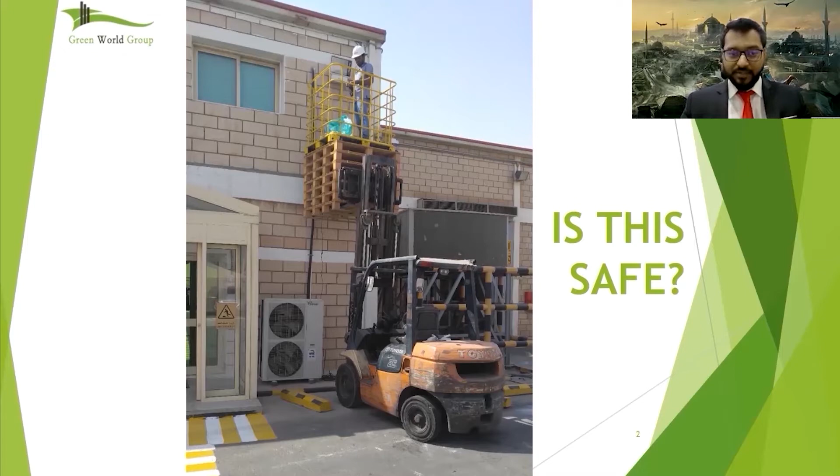So let's talk about the fall statistics, first of all. Falls are the leading cause of death in construction industries, not just construction industries, but also when we're working at height. So most fatalities occur when employees fall from open side floors or through floor openings. Now, the height at which a fall can occur does pose the impact of its severity.

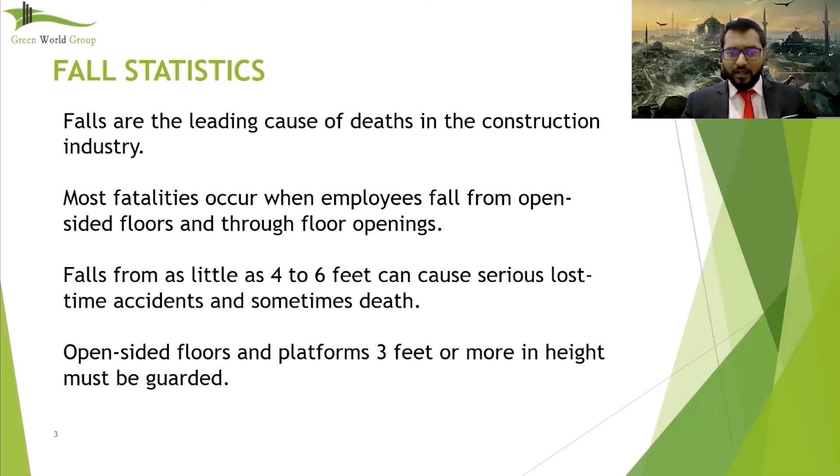But here's the thing. If I were to ask you in terms of many detailed examples, which I will actually further ask you in detail, I'll give you a scenario where we can discuss which would be better. But again, I'm going ahead of my time, let's go on towards statistics more importantly.

So if we take a look at the world scope of fall statistics, we have numerous amounts of people who have fell due to slips or falls that have been hospitalized that would require medical assistance. And that around the world yearly is around 540,000 people. People that end up with permanent disabilities due to these injuries are around 300,000.

And fatalities from slips and falls is around 25,000 a year.

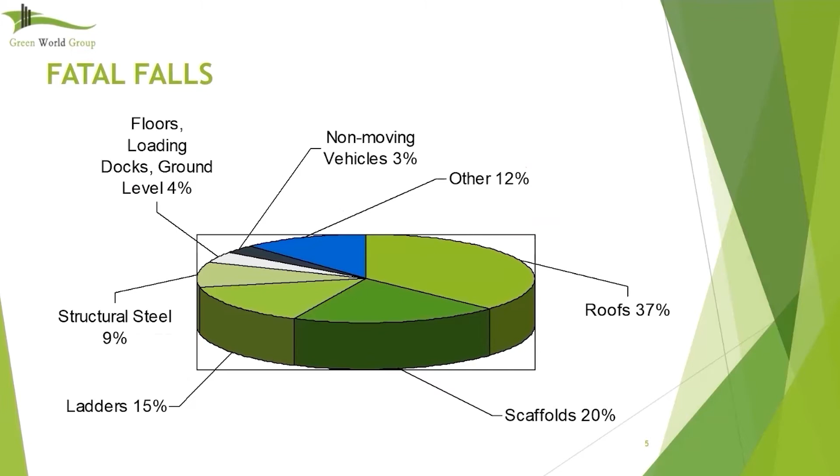Now, where's our problem? We could provide trainings, yes, we could raise awareness, but it all starts within us. We, the employees, must understand the severity of working at height and the hazards that come with it, hazards as well as the risks.

So again, if we just talk about fatalities from falls, we have done statistics over where we can categorize these. As you can see, the most amount of fatalities occur due to falling from rooftops, around 37%. Then comes the scaffolding, which is around 20%. And then working at ladders, either the quality of the ladder or the way the ladder is set up can result towards falling from that height. And then we talk about structural steels, which is around 9%, and so on.

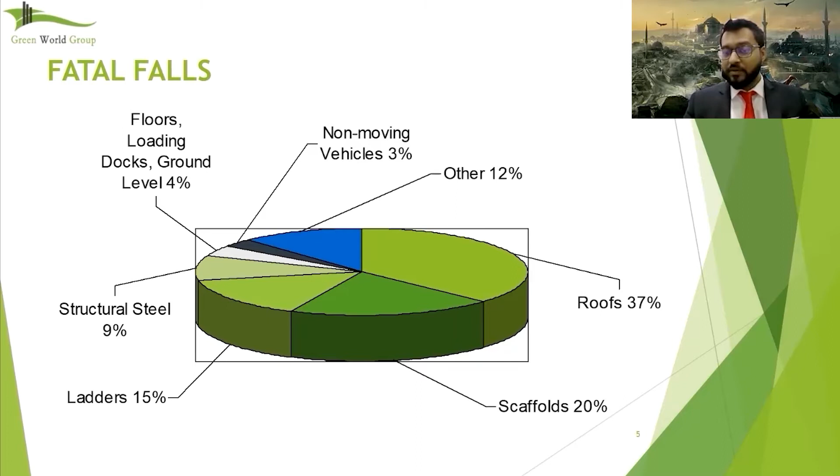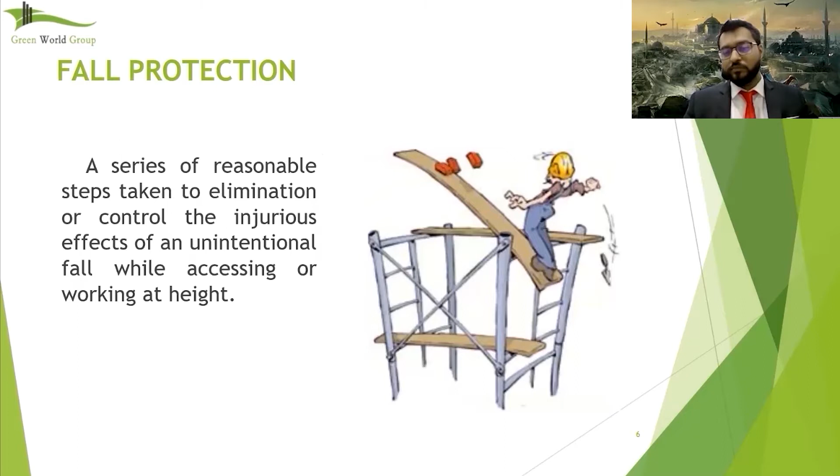But let's define fall protection. What is fall, to be honest? A series of reasonable steps taken to eliminate or control the injurious effects of the unintentional fall while accessing or working at height. Right? So to break it down in a way.

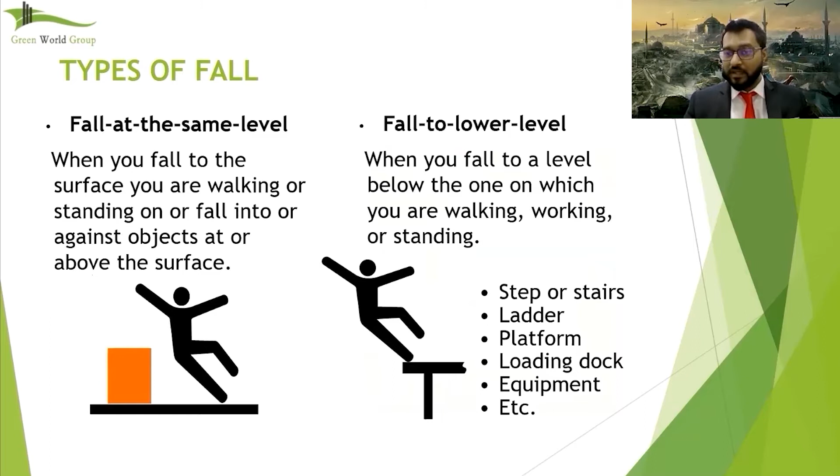But there are different types of falls that we must consider. Obviously, there's the fall at the same level within the surface that you might have fallen from. And then there is the fall to a lower level from a height, right? So these could result from either stairs, ladders, platforms, loading docks, and equipments, such as mobile elevated platforms or scaffolds, right?

So here's the question I wanted to ask you. If you were to stand on the table in front of you and fall from it, that's one scenario. And if you were to stand on a rooftop and fall from it, which would hurt you a lot more, or which would be much more severe?

A lot of people would say the rooftop. But here's the thing: if you're working at a rooftop, you know there's a major risk involved in falling from it, so you'll be well prepared, do the assessment, and manage your safety through it. But if you were to stand on your table, you wouldn't think that much about it.

But here's the thing: the severity of the fall from the table is much higher than the severity of the fall from height. Why? Because when you fall from the table, you probably land on your head, with very limited time to even realize you're falling, and boom, the impact occurs. However, falling from height, you'd still have some time to realize you're falling. There would be some self-awareness, and you'd try to do something to prevent landing on your head, like falling on the side or protecting your head while mid-fall.

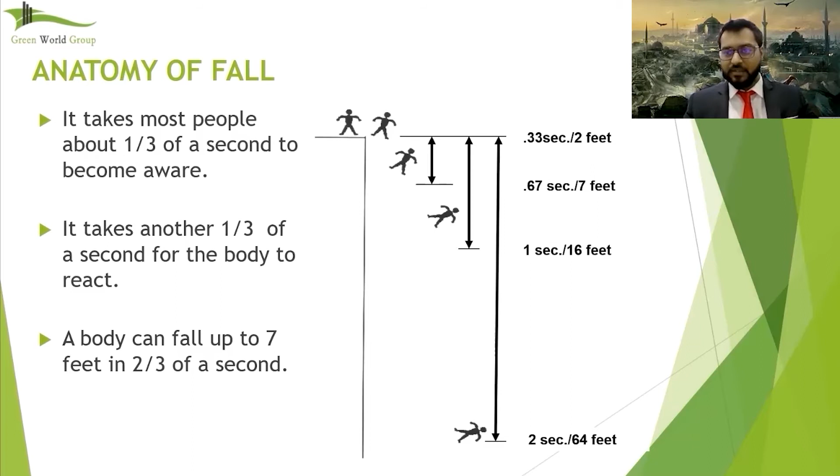Now let's quickly talk about fall protection and the systems towards it. Whenever you're assessing any sort of work, we must always follow the hierarchy of controls. In the fall protection aspect, we must follow the same line of control, but here we're just going to add a few more things.

Can't do that, don't have the right place for it, or don't have the controls for it, then try implementing fall restraint lanyards, which would prevent you from falling in the first place, so you can work as close to the edge without the risk of going beyond.

If that doesn't work, then you go on to the fourth step, which is a fall arrest system. That could be an extended lanyard, a retractable lanyard, or a shock absorbing lanyard. And finally, the administrative control, which means limiting the people who are not authorized to be there—only trained individuals who are competent enough to work at that height.

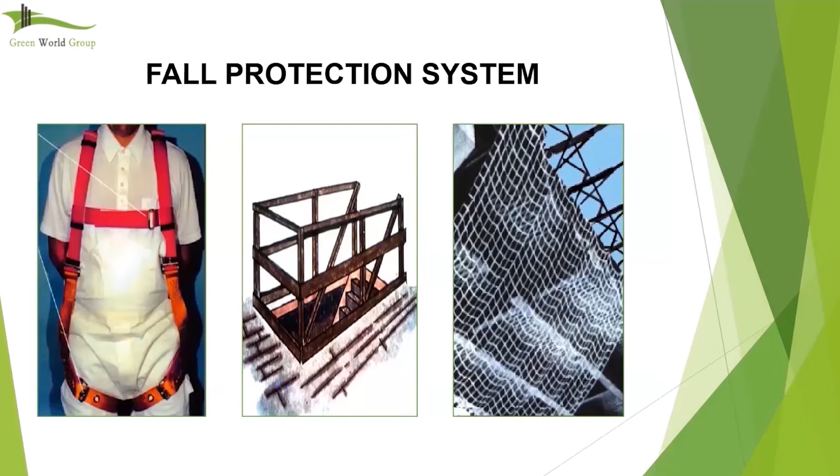So moving on towards the fall protection system, we will talk in depth about the full body harness and its different features.

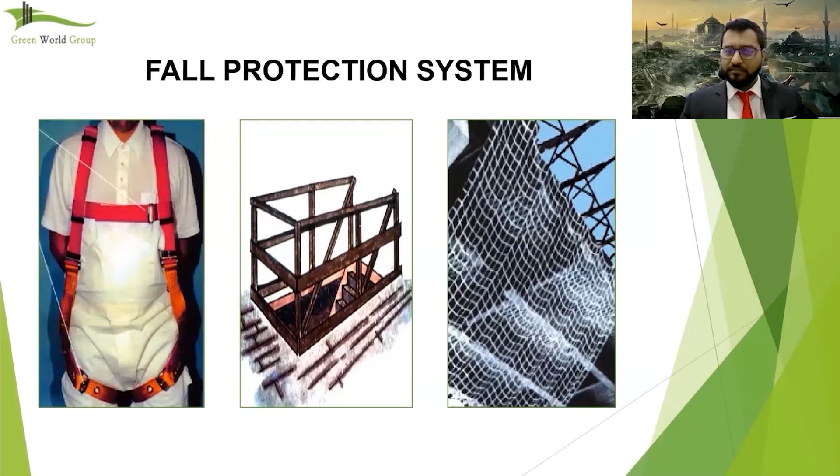The guardrail system is an engineering control to cover up openings within the floor. Another control system would be a safety net.

Now, talking about a full body harness, yes, we've seen what it really looks like, but the main thing I'd like to talk about is the D-ring found in the back. This is the connection point between your harness and your lanyard, to where you will anchor yourself.

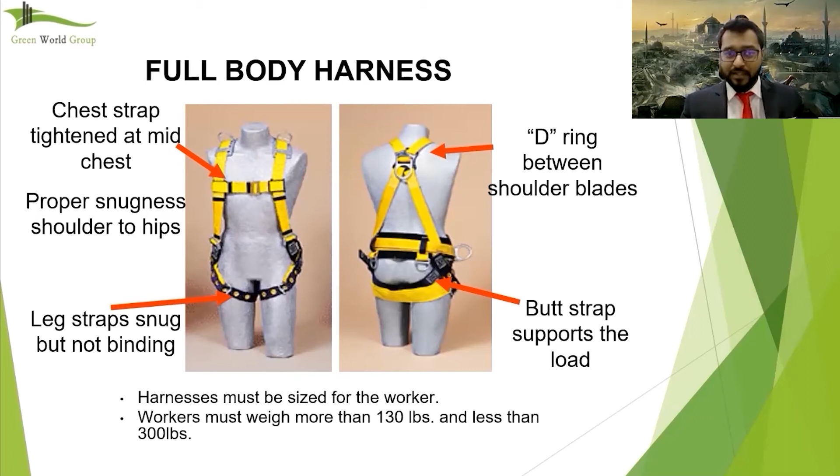Now, how tight the strap should be, you can take one of our in-detail classes, and I can discuss the exact amount of tightness with you, along with the actual practical aspect of it.

Now, different parts of the full body harness, as you can see on your screen, there are lanyards and a full body harness that goes onto your body. Most full body harnesses today are very similar, actually mostly the same, but the difference comes through the lanyards. There's a variety of lanyards depending on the specification of your job or task.

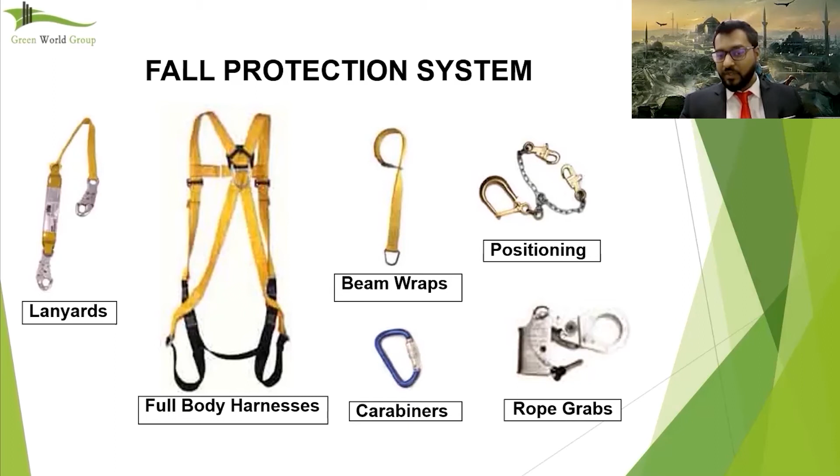And then we have beam wraps, carabiners, positioning devices, as well as rope grabs, which we will also talk about in detail.

So, minimizing the free fall distance, we have to keep in consideration what our height factor is, and if we're using a lanyard that extends and allows a grace period for fall distance, we must keep in consideration what our lanyard can extend to and what our height target is.

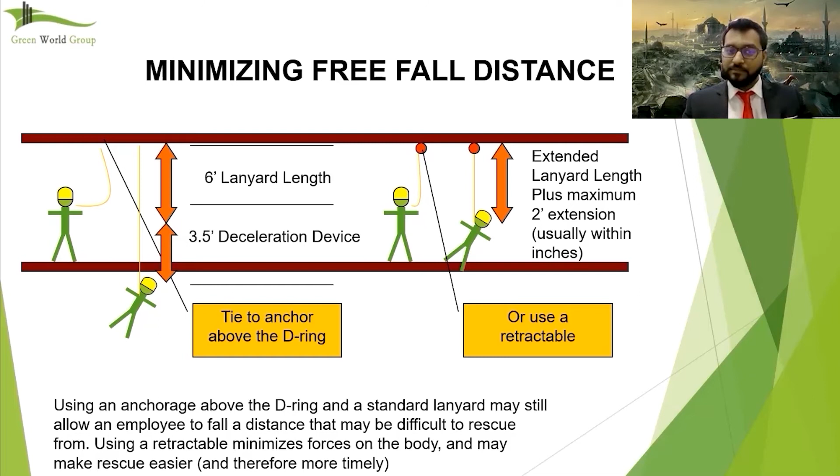For that, never forget that the anchor point must always be above your head height, so you can utilize the safe distance as much as possible from it.

So here's a little more on the calculation of this, which I've just explained to you. We'll go over this very quickly.

With consideration of a 6 feet length, we must have at least a 3 feet safety factor so that it's that far away from the ground.

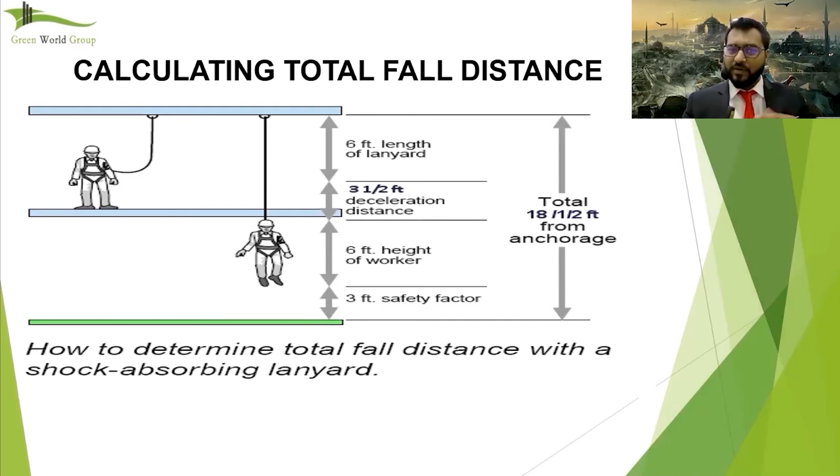Now, even though the full body harness is a great measure, a great personal protective equipment, there are risks involved. If a worker falls and is suspended in the air because of the full body harness he's wearing, there's only a limitation of around 15 to 20 minutes where he can survive.

This usually happens because of the lack of blood flow that circulates through the body, due to the pressure that builds up between the legs because of the straps.

Now, whenever we're working at height, we should majorly consider: if this individual does fall, what is our emergency response? Obviously, our emergency response should be within less than 15 minutes so that we can bring this individual down to safety as quickly as possible to prevent this from happening.

Because if the blood flow gets cut off due to the pressure applied by the D-ring and lanyard behind him, the brain shuts off because of the lack of blood circulation, and this can happen within 20 or fewer minutes. So we must react as quickly as possible.

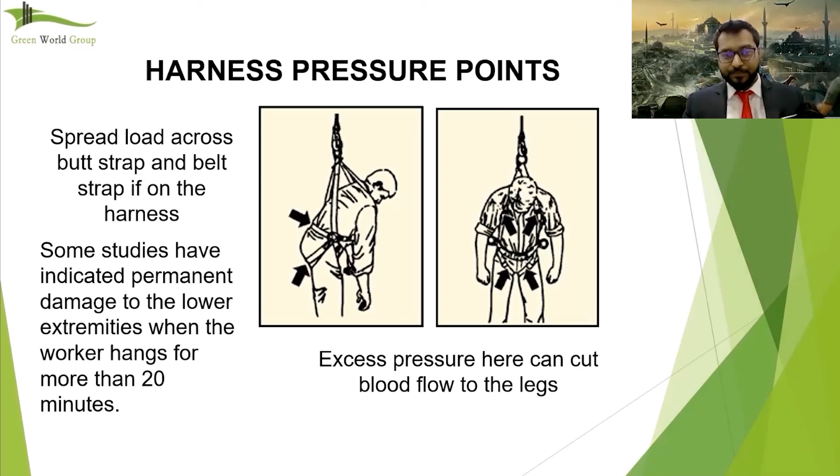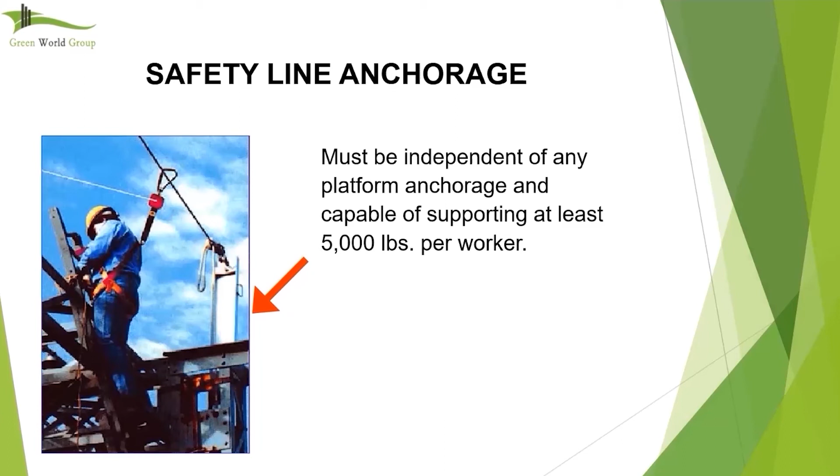So let's talk quickly about different types of control measures, such as safety line anchorage. Now, this supports a certain amount of weight, and there's a reason why we must consider that. For instance, here, this is 5,000 pounds per worker.

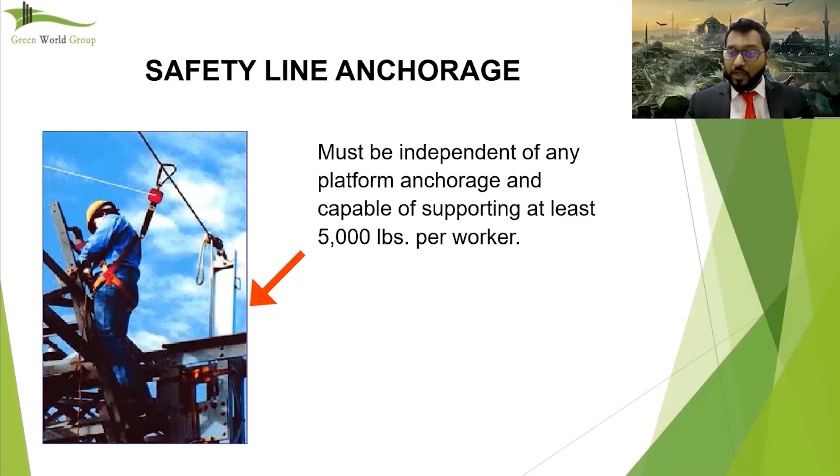Before I get into that, let's talk about different types of anchor points, which could be tailor-made to your job or readily available in the market. You could have these mounted into the foundation so that it stays strong and provides you with the anchor point that you require.

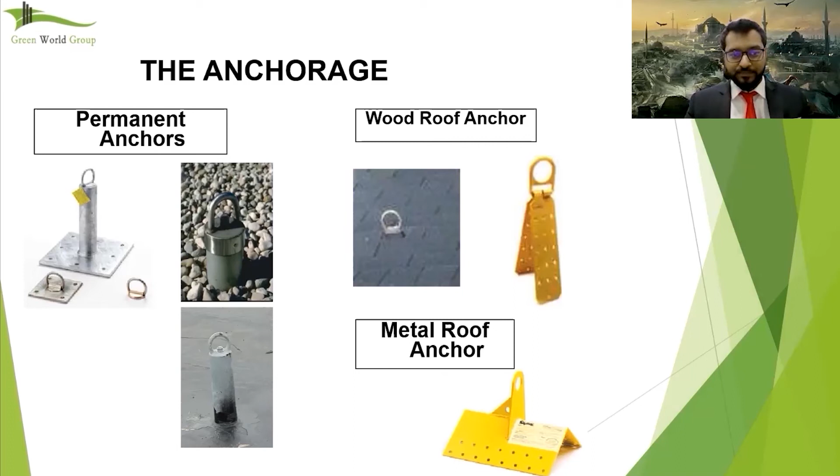Horizontal lifelines are great for walking at height, maybe on support beams where you don't have anything to hold onto. This gives you that support for more maneuverability.

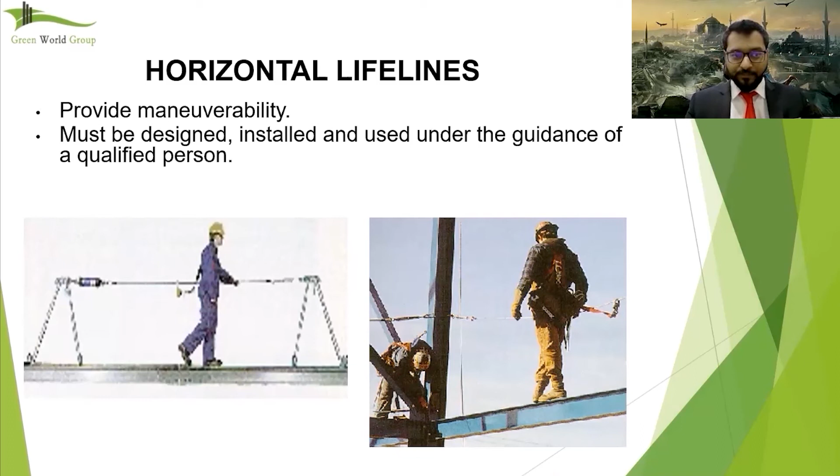And here's what I was talking about in terms of their weight. If you notice, the degree of sag you get depending on the weight is a major issue. So if you have a horizontal lifeline weighing at 72,000 pounds, you'll have a degree of sag around 2 degrees, which is very safe in terms of not sagging that much, meaning you have a safe zone there.

But if you have something that is 5,000 pounds, you have around 30 degrees of an angle of a sag. So there's a lot of leeway here that you can consider in terms of what's below or how far away from the ground you are, and also plan accordingly in terms of your rescuing procedures.

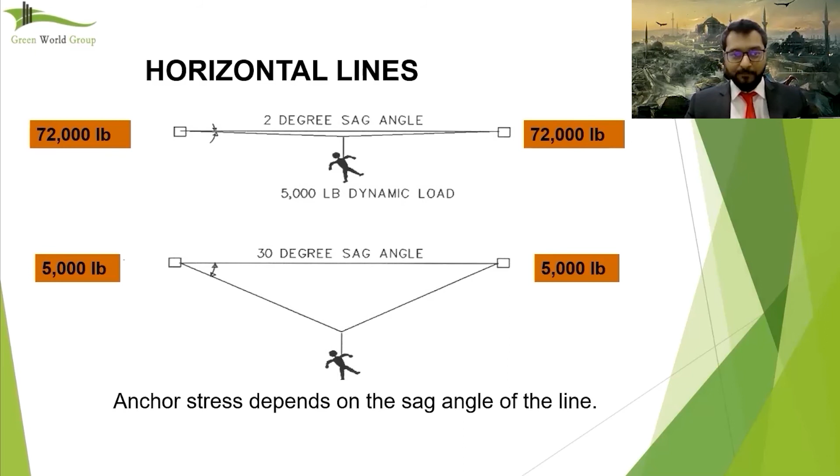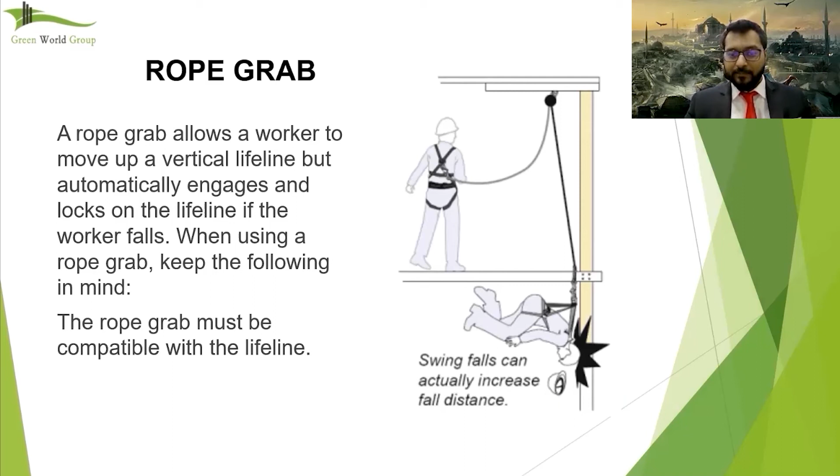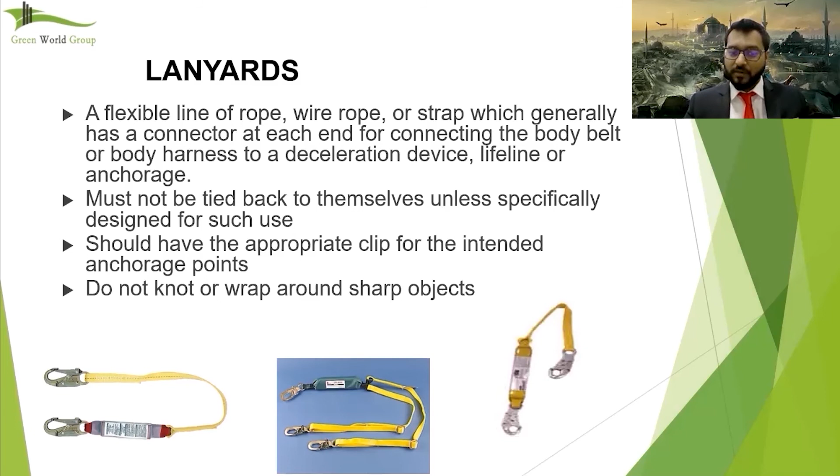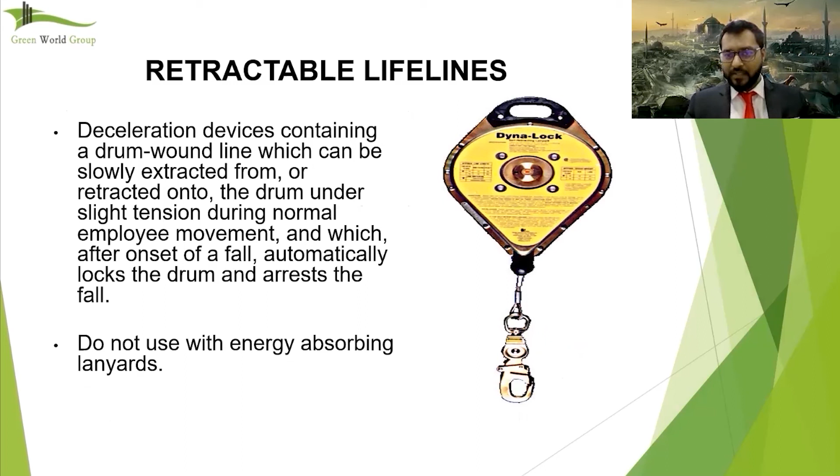All right, so we'll move forward. Now, again, more lanyard types that we want to talk about in consideration. We have single hook lanyards, double hook lanyards, retractable lanyards. These are all connections that you should consider when doing a very task-specific job. There's many options out there in the market, but you must always choose one that suits your activities or your work appropriately. There are retractable lifelines that will decelerate depending on the severity of your fall, or a certain pull, and then it could retract as you get closer to it.

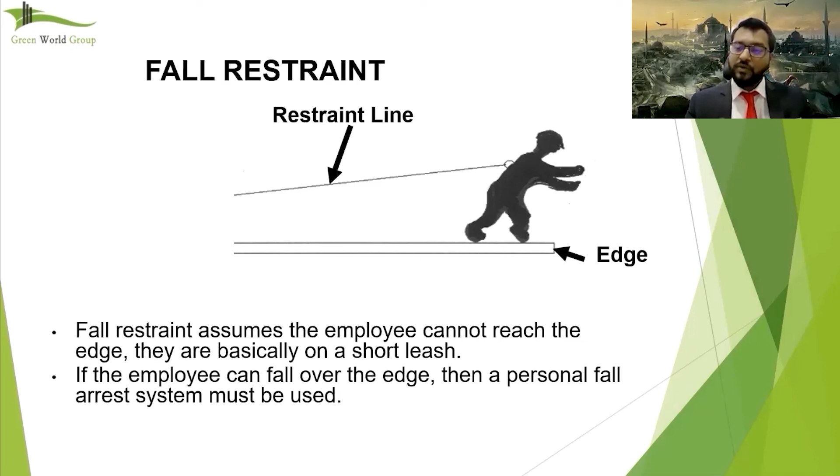Then we have the fall restraint lanyard, which prevents you from falling altogether and limits your movement towards the edge—you don't go beyond that. As you can see in these images, we have support cables that it can be connected to, or horizontal lifelines that it can be connected to.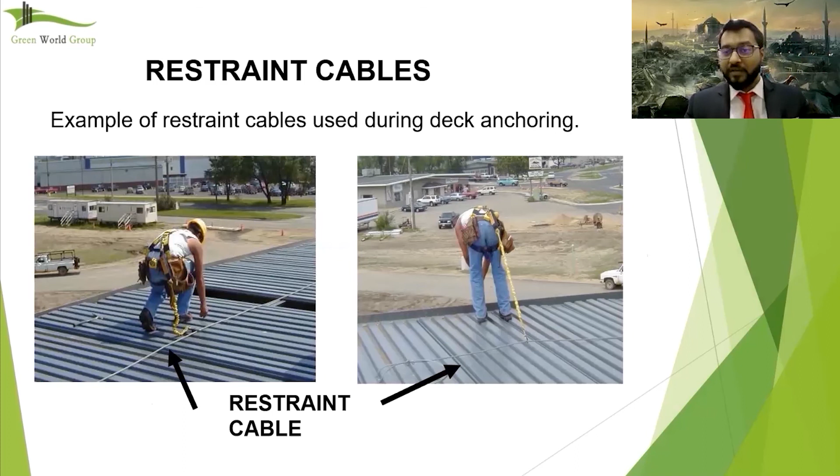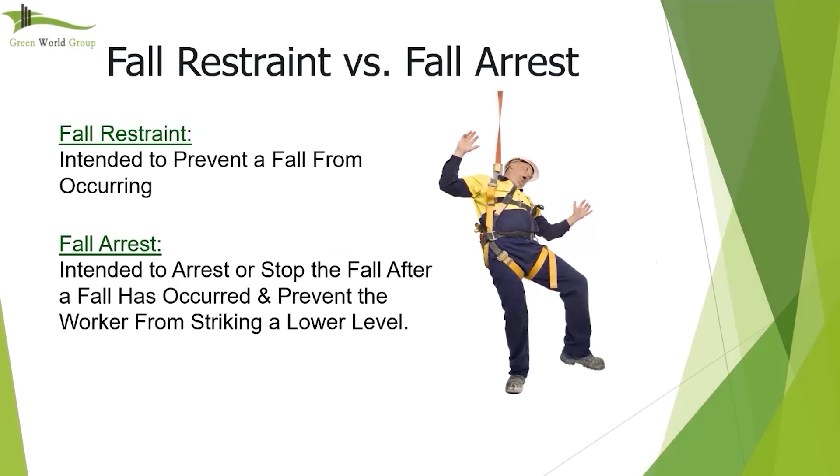This is a major consideration. We must always compare and contrast between the fall restraint lanyard and fall arrest. The fall restraint lanyard prevents you from falling altogether, limiting you from that edge. Then comes the fall arrest lanyard, which allows you to fall and then stops you and holds you. The reason why this needs to be differentiated is because of the line of work that you perform.

So if you were to work on, let's say, a mobile elevated working platform, such as a MEWP, you would prefer to wear a fall restraint lanyard. The reasoning is because if there is a boom flex while you're working, due to certain rush movements or other reasons, there's a limited leniency on your lanyard, which would prevent you from falling out of the basket altogether. However, if you put on a fall arrest system lanyard, which allows you to fall, then you'd be suspended outside of the basket, and you would require immediate rescue.

So which one's better? When we're talking about mobile elevated working platforms, it's preferred to wear a fall restraint lanyard because it makes more sense that way.

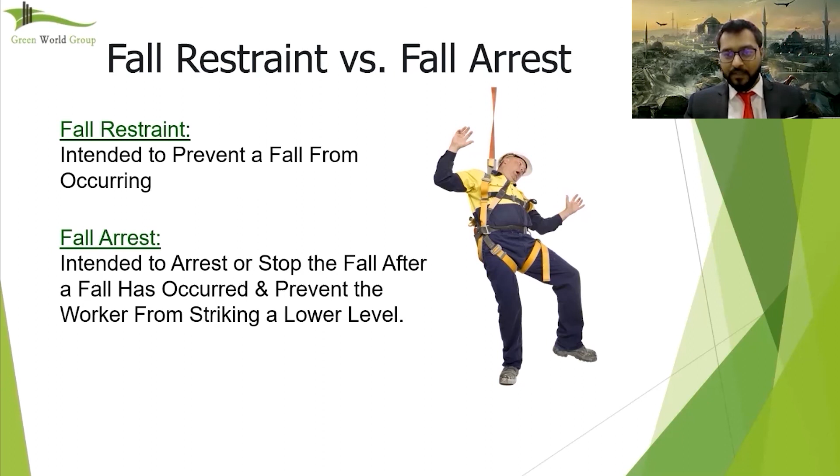But all of this comes down to good work practices. We must, if possible, try eliminating the risk altogether by performing the job on the ground. For example, if you were to make roof fabrications, try building it on the ground and then airlifting it into place by a crane. When you're working around edges, try having an engineering control around it, like a guardrail system, and design accordingly to what the job is really specific to.

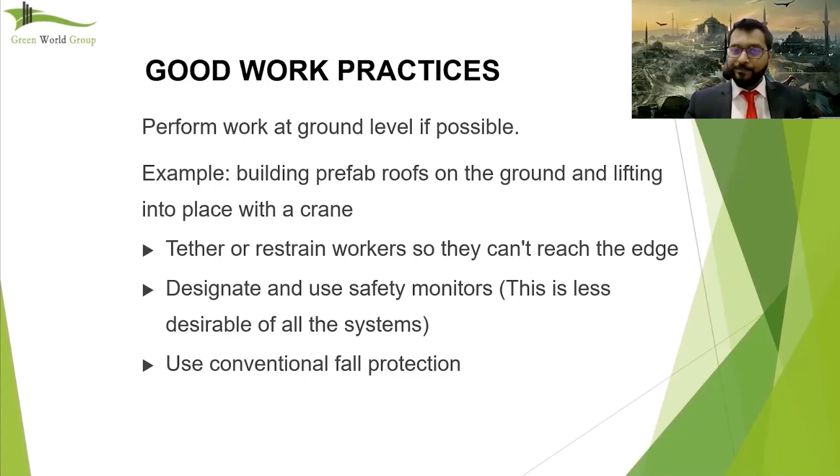But training is where it all comes down to, and we here at Green World will provide you with that in detail. This is a very short intro that we wanted to let you guys in on, but when you decide to take our course with us on fall protection, we will train you in how to recognize hazards in task-specific areas such as scaffoldings, steelwork, buildings, ladders.

Not only that, but also mobile elevated working platforms and so on, and then how to minimize those hazards in those task-specific areas. The training will also cover fall hazards, fall protection systems, and the use of fall protection devices, not just theoretically, but also practically.